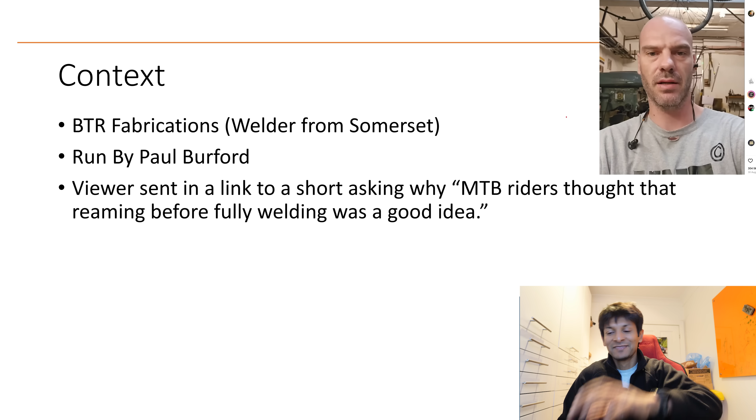Right, now a viewer sent me a link to his short. It's a short video asking why MTB riders thought that reaming before welding was a good idea. If you don't watch the rest of this video, I'll tell you it's not, okay? Now, because I'm technically a journalist, and to keep my journalist ticket, I have to provide the guy a right to reply, and I've done it on 3 separate occasions. He said he has no respect for me and therefore does not want to reply, and he does not want to justify himself in front of a bunch of roadies.

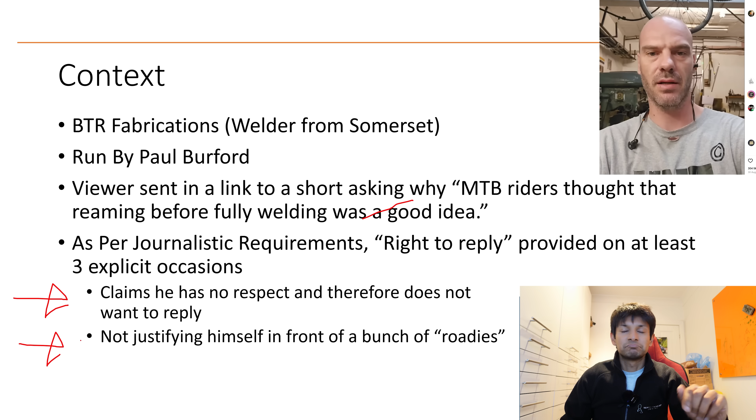But anyway, this is the Instagram reaming I got. So I put up a picture on Instagram and this is what he put: ha ha ha, can't believe I have finally made it to this page. I love watching Hambini's videos, mostly because his lack of real life engineering knowledge is basically non-existent. Does that mean I've got lots of engineering knowledge? I think that's what he meant. All he does is talk loud with zero actual hands-on experience. Well, it's better than Luescher fucking Teknik, isn't it? Because that would be just like the most dullest discussion ever.

Right, and then some more shit from all these people. Dude, please tell me how you can see from this picture whether the finish is out of spec for the intended application. Correct, you can't, blah, blah, blah. Right, if that isn't a head tube, then there isn't a problem, blah, blah, blah. And some other fucker. Right, and someone else as well.

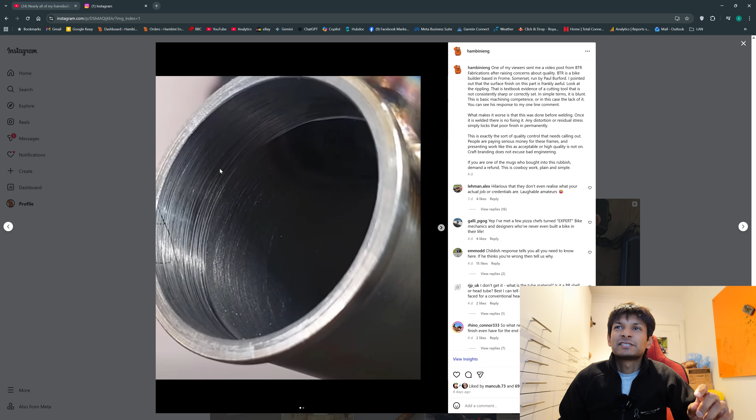Let me show you the picture in question. So this is the picture I took, and I just briefly commented and said it was a bag of shit. You can see all these lines in it, and I also copied out his little things where I just put crap surface finish, and he said, "You haven't a clue. Get back to measuring frame alignment with a piece of string." He could have lived to regret that, but let's carry on. Right, let's play this video.

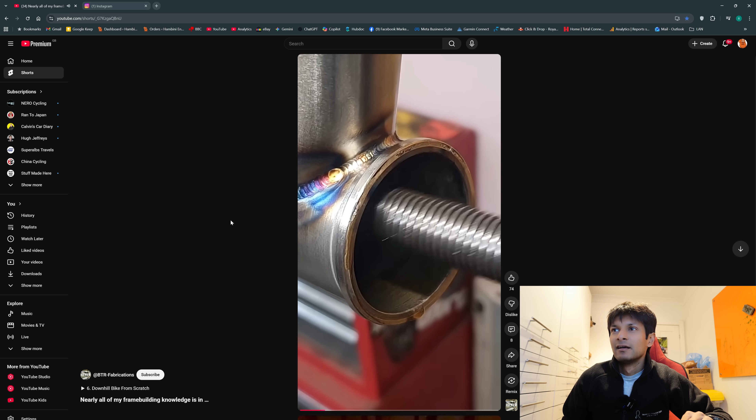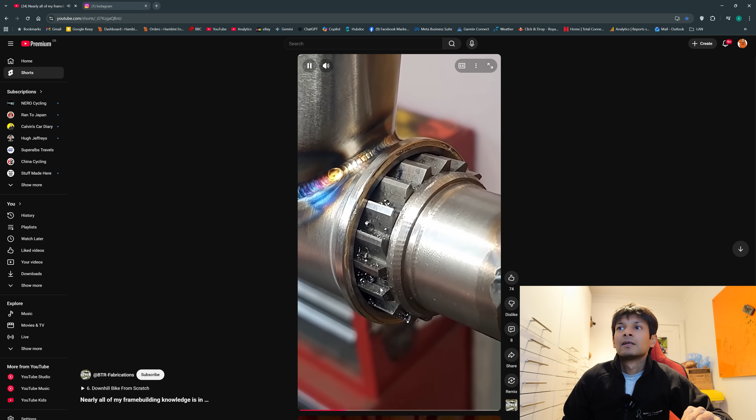So there he was, giving it a bit of finger action. I'm just going to stop it there. Notice his cutting tool is full of swarf. I'll stop it again there. Notice the frame was shaking around. And also notice that this frame isn't fully welded. So this tube is welded, but this one is not.

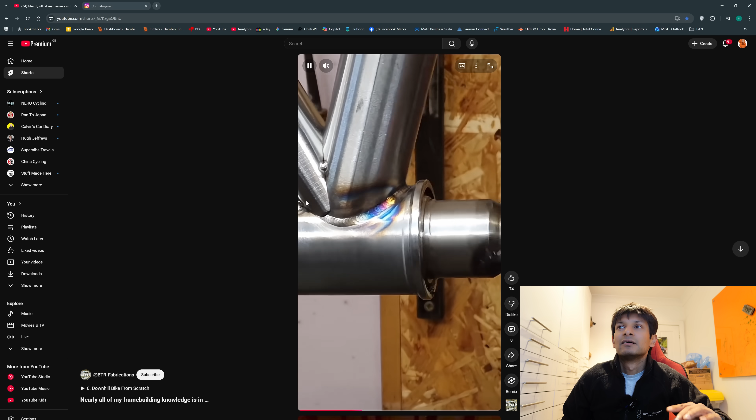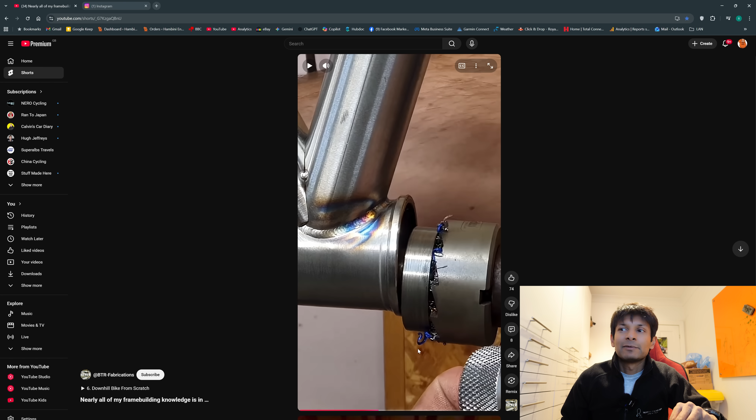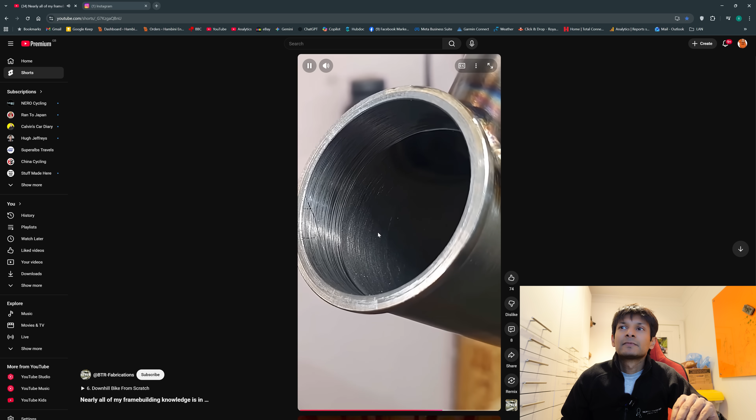Then notice that we've got the facing tool that's come in, complete with blue contaminated bits of paint and God knows what else. Bit of filing. And this is the screenshot that I took to put on Instagram. And this is the other side. Now, let's listen to his commentary.

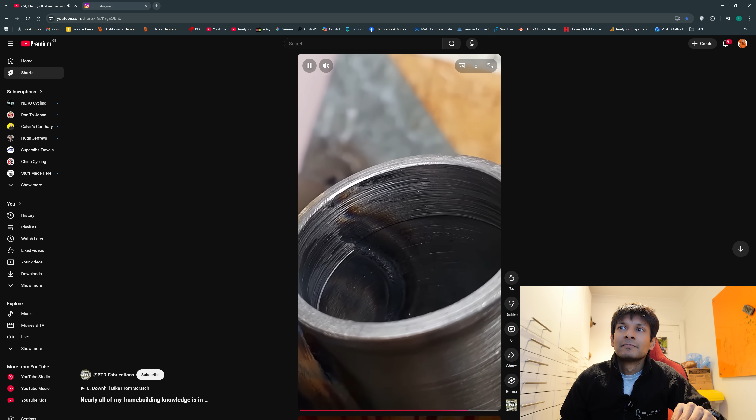When we ream and chase everything is because it deforms during the welding. You can kind of see it a bit there where it's missed a bit. It's missed a bit, distorted during the reaming process. And the rest of it is reamed and it's just that one little section that's missing, so everything's all good.

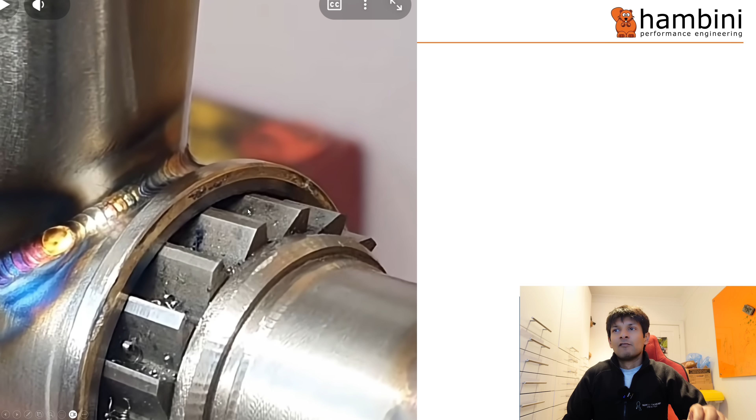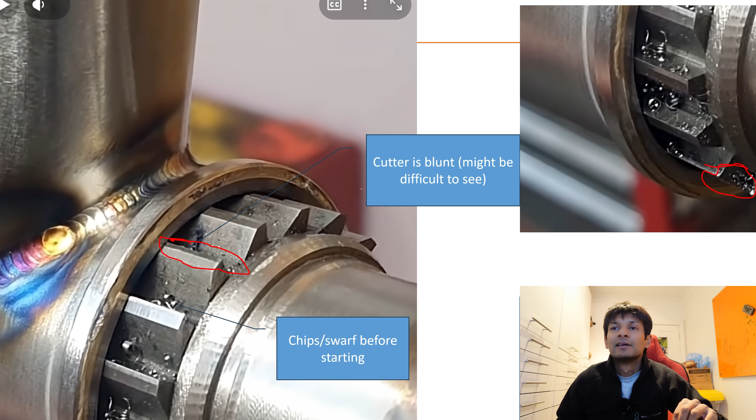Right, let's go through this in a bit of detail. The first thing is you've got chips before even starting, right? And the cutter looks to be blunt, because if you look at these things here, they're rippled. Jeez, right? And then if you look down here, where these chips are, they all congregate at the bottom. And then when you turn the cutter round, it embeds itself into the sidewalls and then it picks up.

Now I think this material is probably like 4100 series steel. So it's chromoly. It's not quite stainless, but it's soft. So chromoly is around 20, 22 HRC hardness Rockwell.

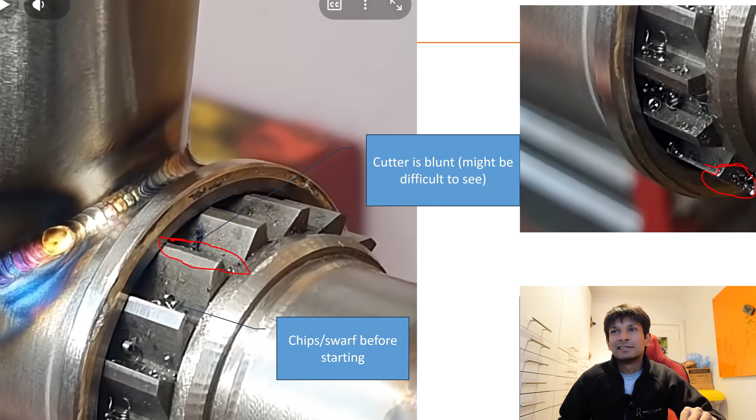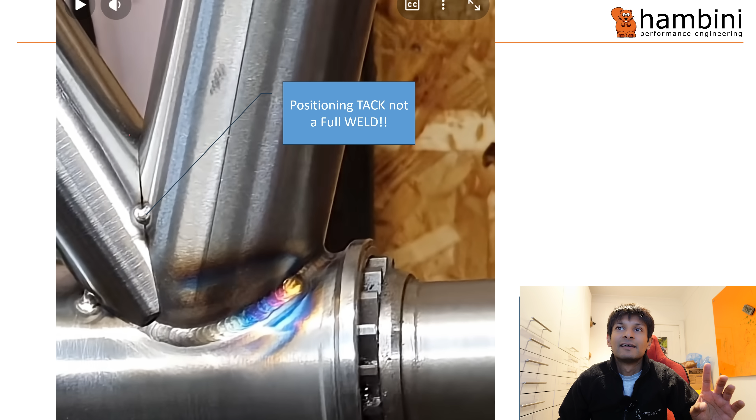Whereas, you know, if we were to take the other extreme, bearing steel is like 58, 60. Now we've got this, okay? Now that is not a full weld. There's a load of mountain bikers out there telling me that this thing's fucking fully welded. It's not, okay? That needs welding, so does that. That is a tack. That one is also a tack.

And it looks like it's been welded left to right, and a piece looks like it might have gotten very hot by the crater, because if you look at the colour around here versus the colour here, it's obviously got a tinge of blue. Whether that's important or not, we'll find out.

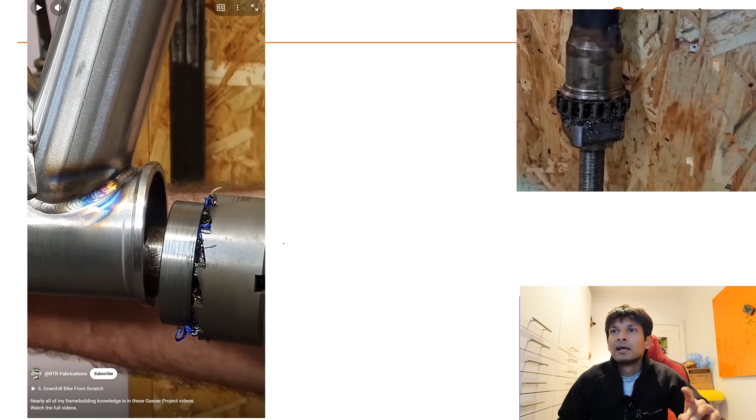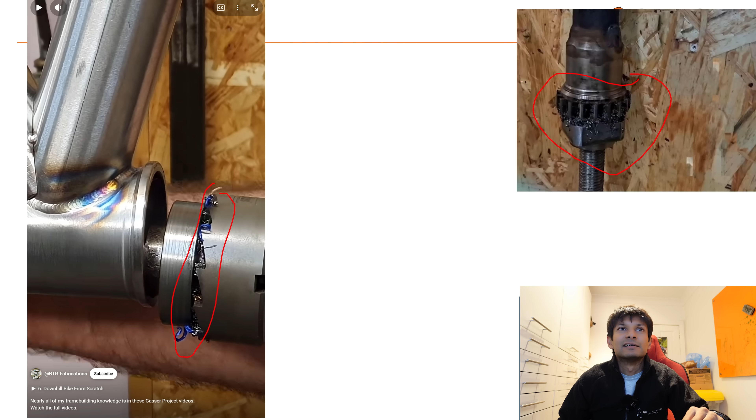Now this, I mean, this is just scandalous. This is the facing tool that he uses, right? Just look at all the chips in there before he even gets it to the bottom bracket, right? Material contamination in there. And then I was just looking at some of his other Instagram stuff. He does a workshop tour. That is his cutting tool. He leaves it like that to go on to the next piece of equipment. Absolutely ridiculous, right?

Again, here at this point, this is still not fully welded. Now, normally, kind of like rules of thumb, people talk in Ds. So whatever that diameter there is, I call it 50 mil for argument's sake. They would normally say 5D or 3D if you don't want to get any distortion. Well, this is well within that. I don't have a weld procedure for it, but we're going to come to that. And then, yeah, the contamination in there, it's just ridiculous.

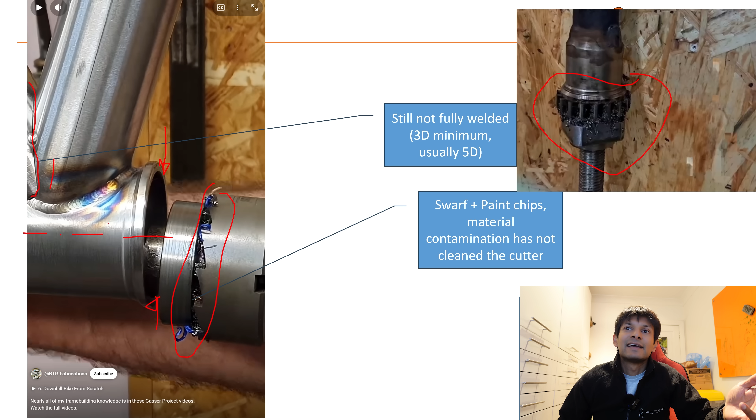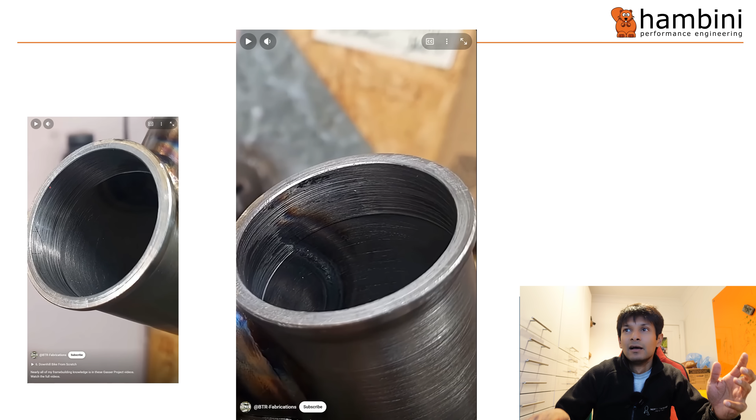Now, when he does weld it, so if he welds around there, then the central axis of this is likely to bend, because welds cause metal to shrink. So it heats up and then shrinks. And then it's going to weld and then bend like a fucking banana. Right? This looks like galling to me. When I first looked at it, I thought this is a combination of the cutter and a blunt tool. So if you look, the hole is distorted.

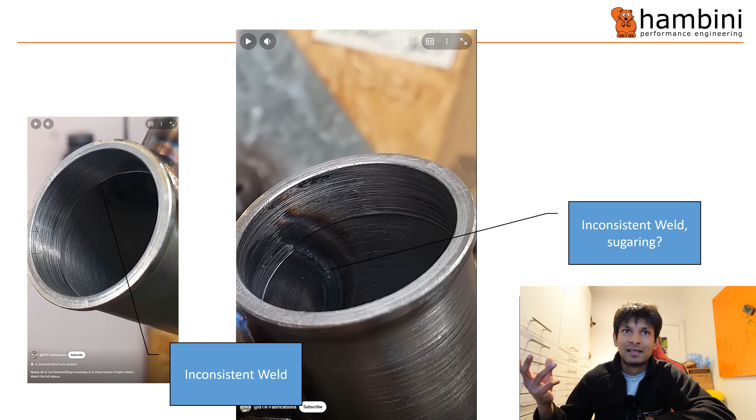We've also got a bit of inconsistent welding, sugaring, maybe, I don't know if it's been purged or not. That's the first thing I looked at, because if it hasn't been purged, then you're at more risk of corrosion. So it corrodes at that point. If you look at a lot of bike frames, they tend to corrode at the joints. And then look at it. It's just ridiculous. It looks like it's been friction welded. So the little chips, and you can see them, have gone round, picked up, and then left these fucking tram lines in there. It's just absolutely appalling, okay?

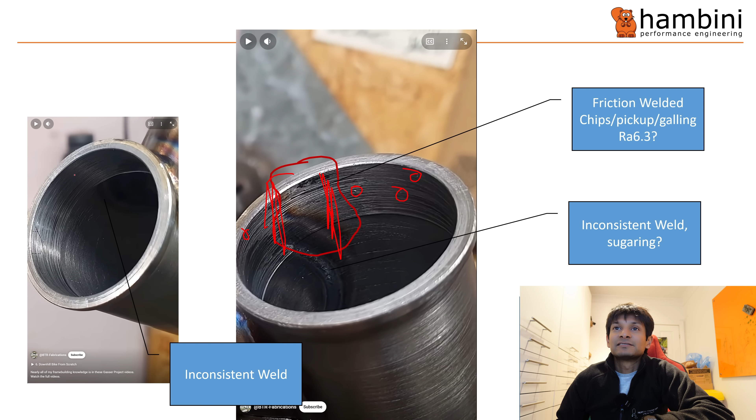Now, there are some people who have said this is a Paragon head tube somewhere from California. And apparently that's got 0.5 mil of machining allowance. So it's taken up more than that. So this segment here, between there and there, I don't know, 25, 30 degrees, okay? It's totally distorted. And it's just ridiculous. So this is the picture I put up. This is the entire thing. If someone accepts this, don't know.

Now, is this a reject? Would I reject it? Yes, I fucking well would. Half-arsed workmanship and diabolical machining sequence. No one in their right fucking mind reams it before they finish the welding of it, especially because the head tube's likely to bend, right? These are statements of fact. Well, the first one is a statement of fact. The hole is not round because the cutter has not kissed the full circumference, right?

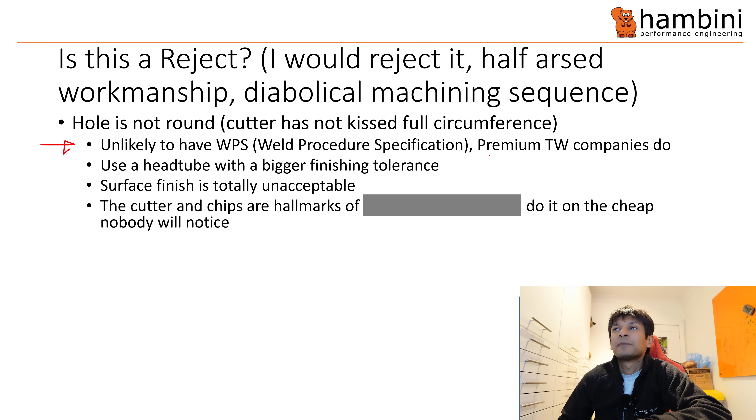Now, he's unlikely to have a weld procedure specification, or WPS, right? If you're going to buy a frame from one of these artisans, just be aware that if you go and buy something off the shelf, premium, a lot of the Taiwanese companies have weld procedures and all that kind of stuff. In the next slide, I'll talk about that. Now, he could have used a head tube with a bigger finishing tolerance. So instead of it being 0.5 mil, he could have had like 1 mil. He might not have got his reamer in there, but whatever. That surface finish is completely unacceptable.

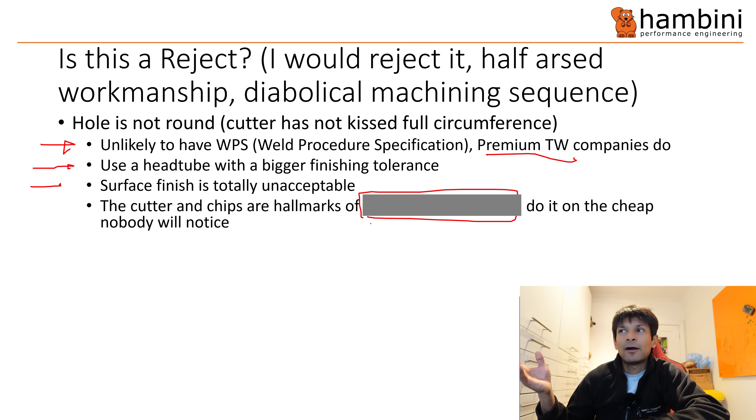And the sugaring on the back, I mean, I'm not a materials engineer by any means, or a welding engineer, but I asked some people who were. So there's this body called the Welding Institute in the UK, TWI, the primary body for materials technology, and a couple of these people are fully accredited by them, and they said it's just a fucking joke. Okay, they didn't say fucking, they said, oh boy, do it on the cheap, no one will notice, it doesn't matter. But it fucking matters, it's not even round.

Right, and the reaming should be completed after the head tube has been welded, because as soon as you dump some more heat in there, okay, first of all, it like partially stress relieves it, then you get it hot, then you get it cool, it just bends it more like a fucking banana. I would hazard a guess he has not clocked the top and the lower bearing seats to see what the run out is, and I bet they're fucking miles out. Right, reaming before welding is absolutely fucking mindless.

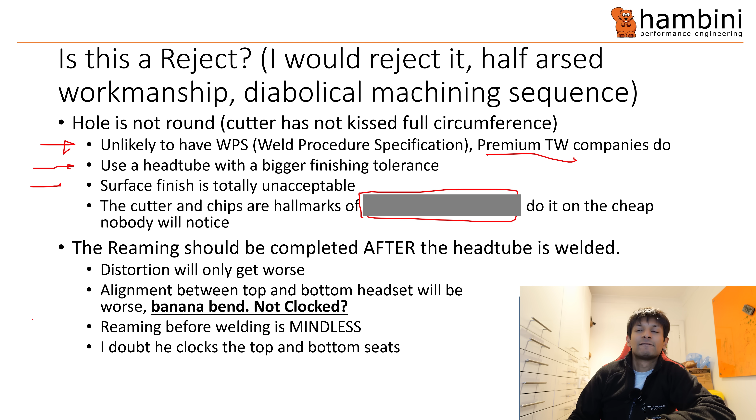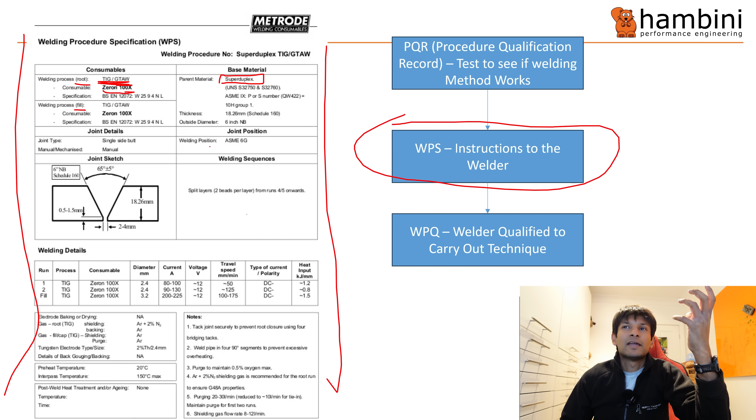Now, anyway, the bits of this that are important is it specifies the weld type, so you've got TIG, the filler material, the fill material, the root material, that's related really to the joint geometry, weld geometry, and then the type of weld. So you've got single-sided butt weld, and then welding position is you can either have flat in front of you, which I think is 1, 6 I think is overhead, I can't remember for sure, and then what you're welding. So you've got super duplex steel, how thick it is.

So sched 160, schedule 160 is the wall thickness. So if the sched is higher, so let's say it was sched 320, that is a thicker wall than sched 160 and sched 80. So sched 80 is quite a common pipe. Sched, I think 40, 20, maybe 10. But anyway, that's that. Oh, bollocks.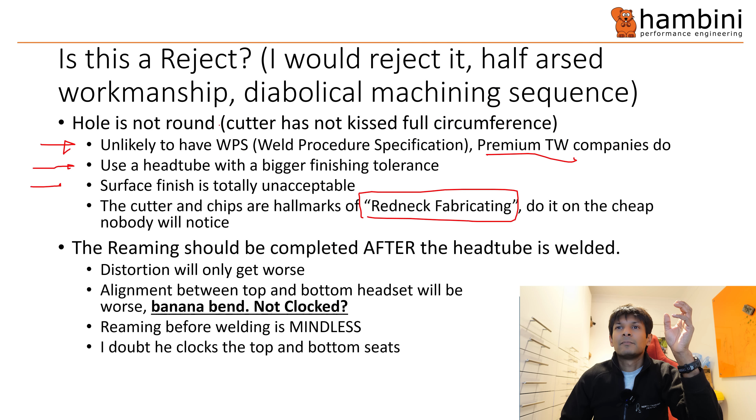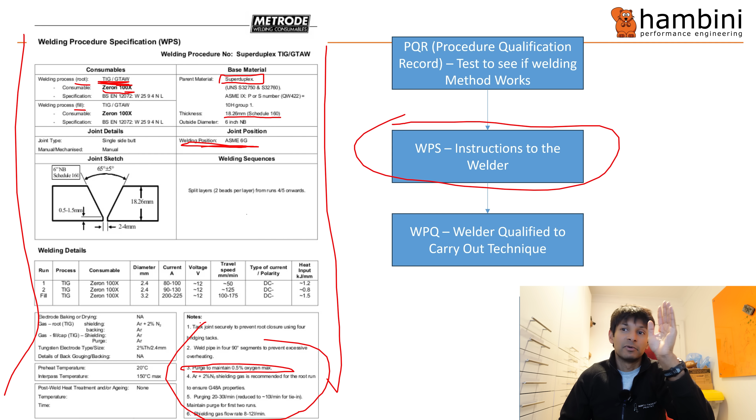Right. And then you've got the weld details, how fast you're supposed to weld, current, all this kind of stuff, and some notes in here. You've also got something in there about purge gas on this particular one. Now, that purge gas can make or break a weld, because sometimes in order to qualify it, you need it, and other times you don't. But there you go. Again, I'm not an expert, but I have seen my fair share of weld procedures in my time.

Right, the conclusion, right? Make your standards so low that you reject nothing. There is no way I'd fucking accept this, especially for like 3 grand, 4 grand. Here's my artisan bike frame. Just go buy one off the shelf from Taiwan with its weld procedures, fully purged, robotic welded, right? The bar must be set so fucking low that MTB riders consider this good. And they're always rabbiting on about the quality of BTR's welds. Well, I don't think they're that great. But anyway,